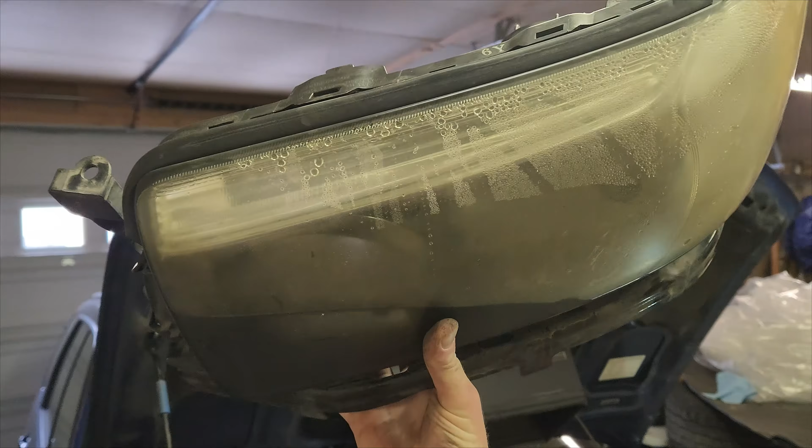I've got a fishbowl for a light. Look at that! What the heck? I've never seen that much. That's insane. How did these lights work at all? Don't overfill your blinker fluid.

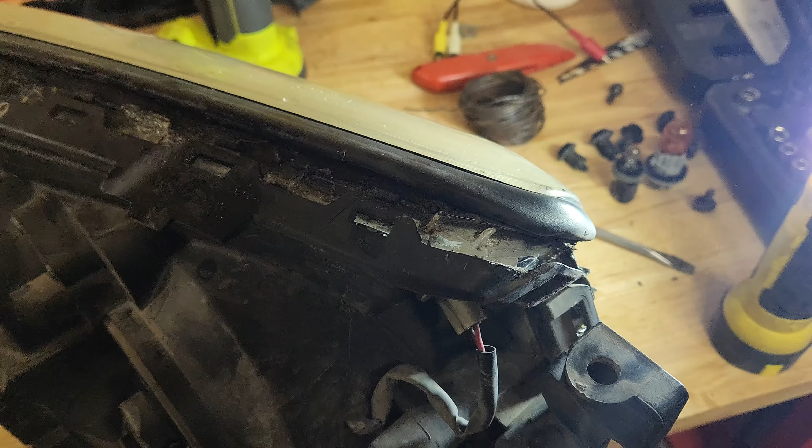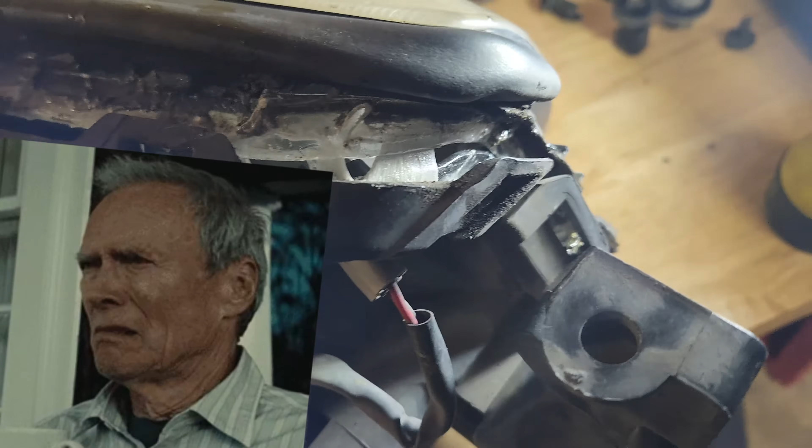As you can see, this headlight was well beyond the point of needing to be repaired. So after getting it out of the car, splitting it apart, that seal is gooey, it's disgusting, and it failed a long time ago. Right, so I got it apart.

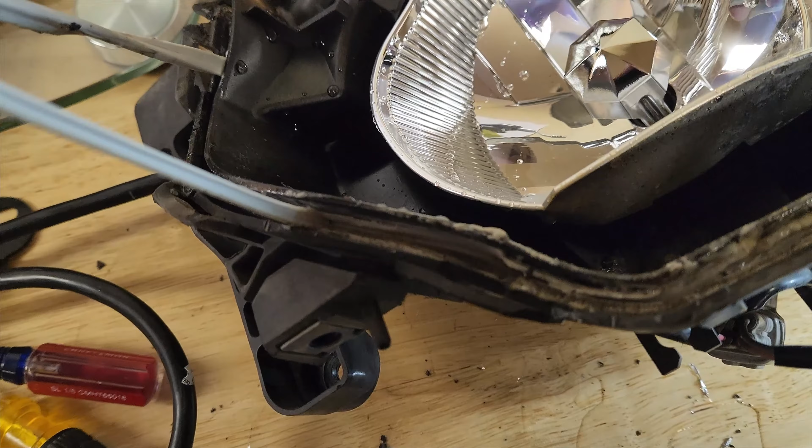Now I'm just going to work on getting this old seam filler pulled out because I've bought new ones. So we'll go nice and slow, hopefully it'll all come out nice. The best thing I found for cleaning this up after removing what I could was actually using gasoline and a rag. It took me about 45 minutes to clean everything out, but once I was done with that, I could finally move on to getting the new sealant.

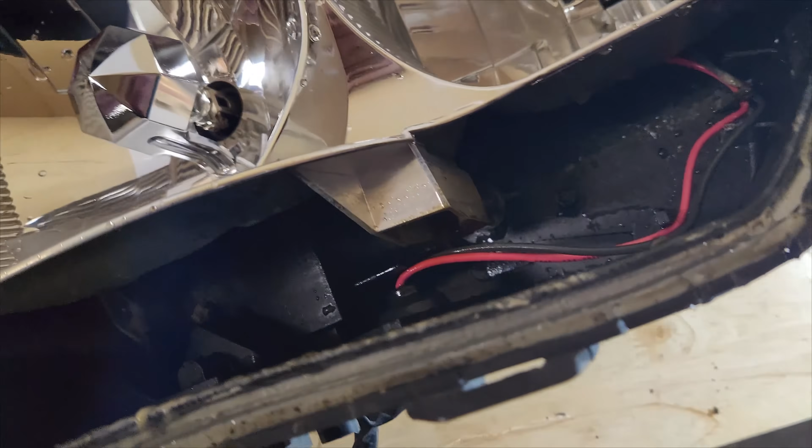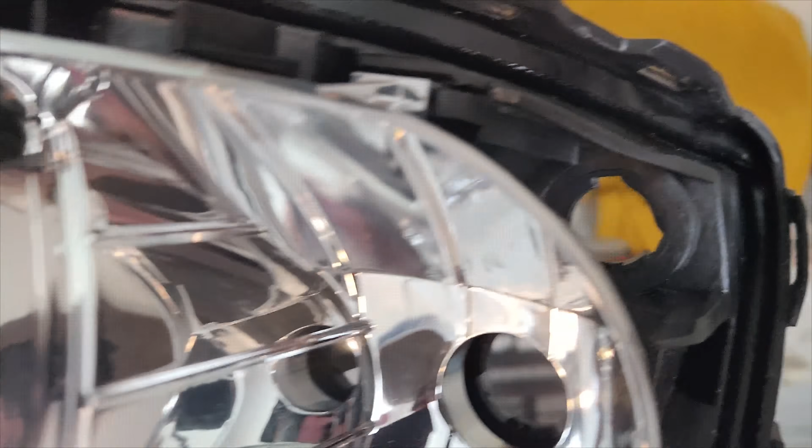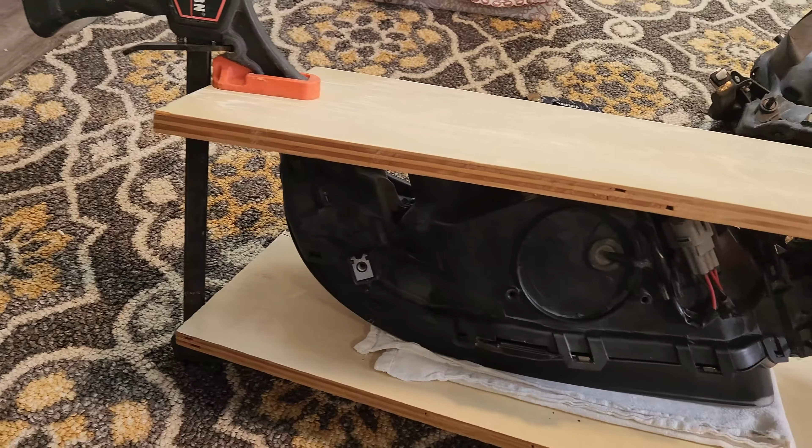You heat it up in the oven, and then you just insert it in. Alright, so I've got it running inside the channel here. Now it says to combine the two, so I'll just again dust everything off one more time. This is the last time these are going to be apart. Throw this guy on there. Alright, so now we've got this clamped down, and then just making sure each clip has been pushed down, and then we just let it dry.

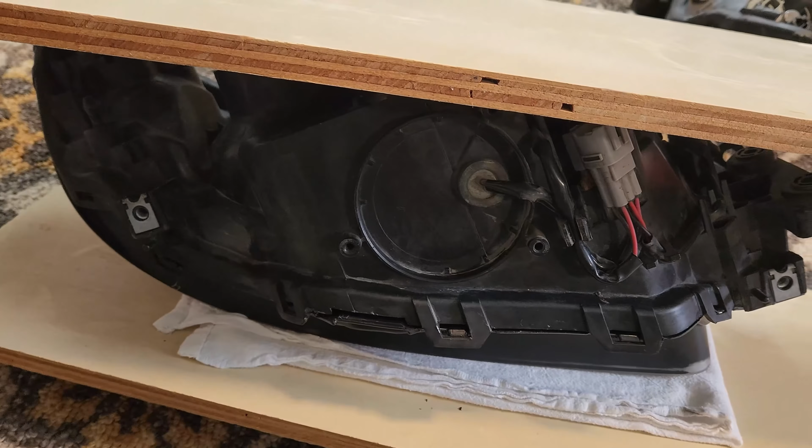So it takes 30 minutes for it to get back up to room temperature, and then we cross our fingers and hope it's sealed. And before we jump into putting clear coat on the headlights, I do have this STI hood scoop off the 2003 STI.

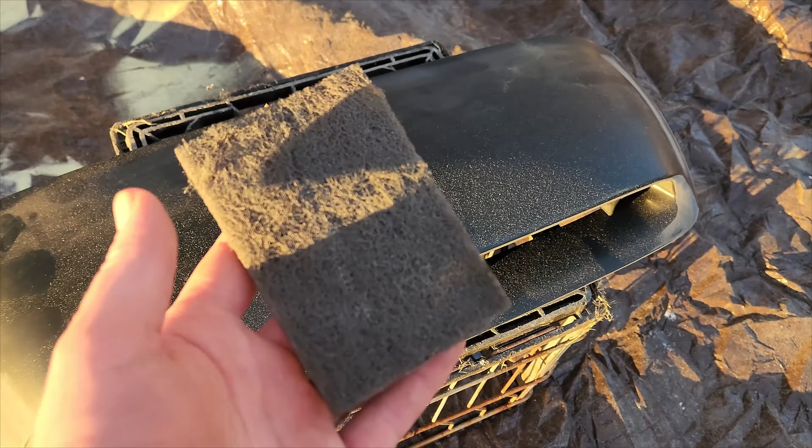I bought this brand new from Subaru, and really I just need to sand it, prime it, and then tape it and get it ready. And then that way, after I've got the base coat on, I can clear coat the headlights and the hood scoop at the same time. So we'll sand this down and then we'll get ready for paint.

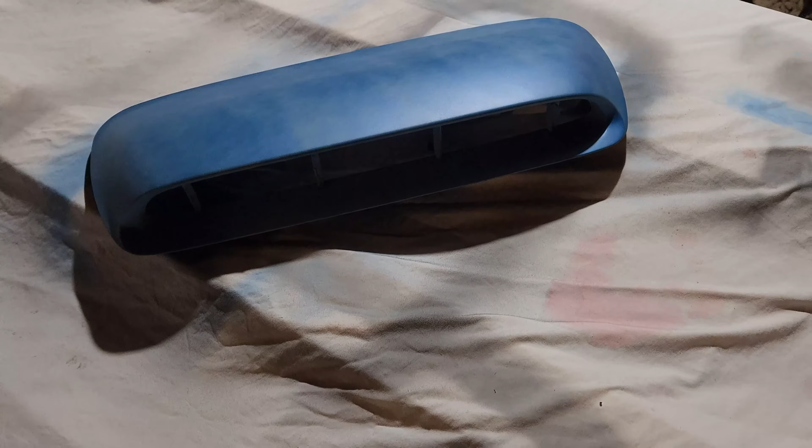Alright, so this is about 3 coats of primer and 1 coat of paint. And this is about 3 coats after that. So a total of 4 coats of base. Definitely looks a bit flat, like a base coat would.

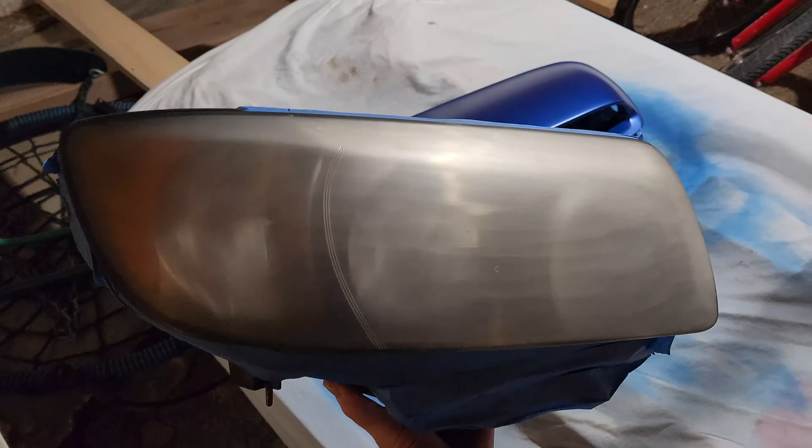So we're going to move on to remove this blue tape on the fins. We've also got the headlights here, this is up to 1500 grit, so we'll clear coat that guy as well. Alright, so after a couple layers of clear with the 2K, you're left with this final result.

Between that base coat and this, I'm really happy with how these turned out. Finally going to look good to have a painted hood scoop. Looking pretty darn good as well. I think those are about as close to a factory finish as you can get for headlights that have been sitting out in the sun for about 12 years. So very happy with these results. Let's get them back into the garage so we can finally get them installed.

Well, there you have it. That is a brand new scoop, looking minty fresh. And here you can kind of see, obviously it's not that dramatic of a difference, but I'm hoping that if I restore this paint, a little bit of paint correction, the differences won't be so significant. It'll be nice to have a bigger scoop, and then we'll just get the headlights in and we'll restore those, and we'll be all good to go.

One issue I did have with the headlights was that 2K clear. I don't know if it was too cold or what, but I have like these micro cracks. It's definitely in the 2K clear. I've never had that problem before, but we're just going to install them for now, and then we'll fix them later. We'll probably just sand them down and do another 2K. But for now, this is what I got.

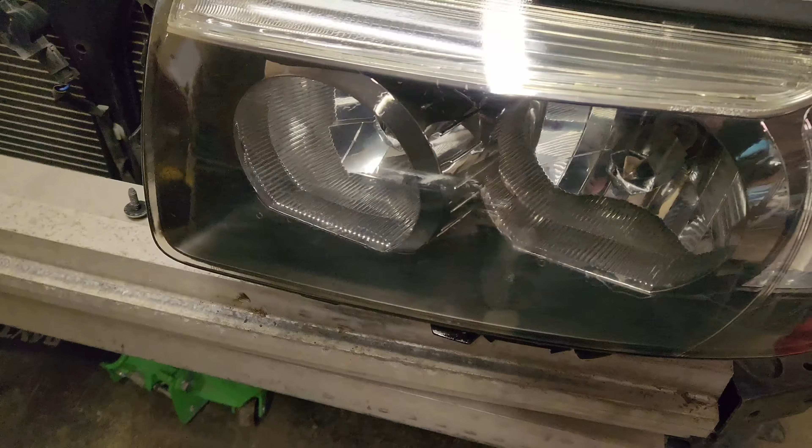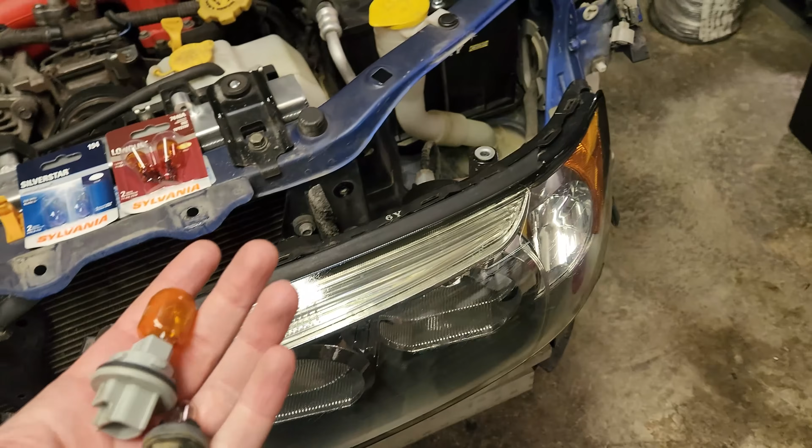New headlight has arrived, looking very good. So we'll start grabbing some bulbs, get these swapped over. Normally I wouldn't really bother switching out bulbs, but these are such a pain to get off, and I already have them off. Bulbs are cheap, so just order them now. Alright, we're just going to test these and make sure they work really quick. So far, so good.

And just a quick reminder how far we've come.

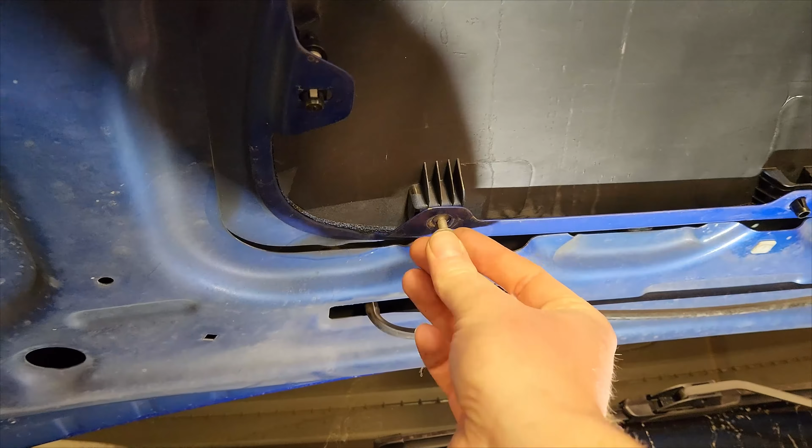Okay, step back a little bit. Oh my gosh, that looks huge to me. Oh, it looks good though. That I can work with. Sweet, I love it. Love it, love it, love it. I love it! Come on, let's go!

Alright, so we're making progress. Fender liner is off, I'll probably tidy it up a little bit since I got everything off. And then once that's all cleaned up, I've got an aftermarket liner, whatever that is, TRQ. And we're gonna see how well this bad boy lines up.

Really, all my old one was missing was this chunk right here. And what I found was easiest is there's that bolt up by the strut. Start with that so it holds up the whole thing.

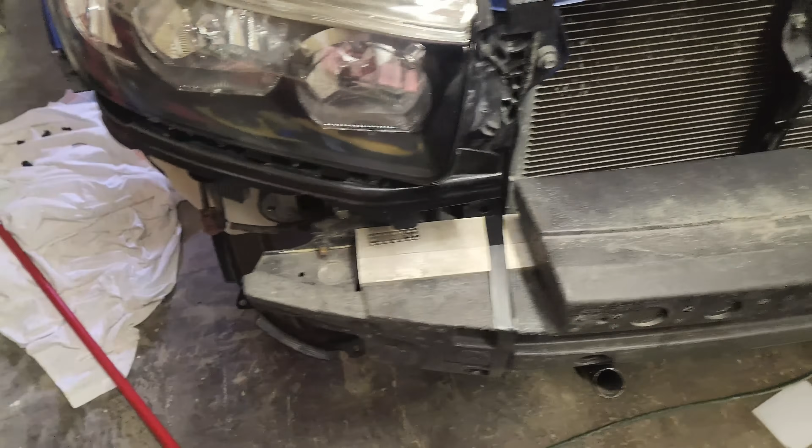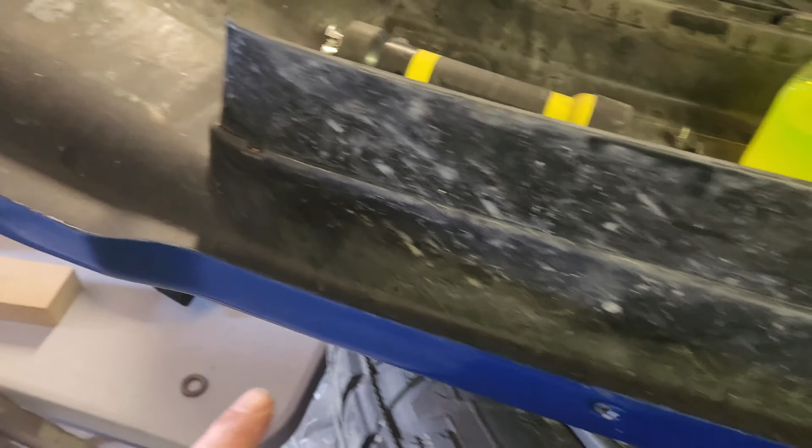Alright, with the fender liner on, the next step is getting ready for the sport lip. So you can see there was double-sided tape here. The factory one got ripped off. I guess the previous owner was getting towed out, and unfortunately the front lip didn't make it. So I'm going to be replacing it today.

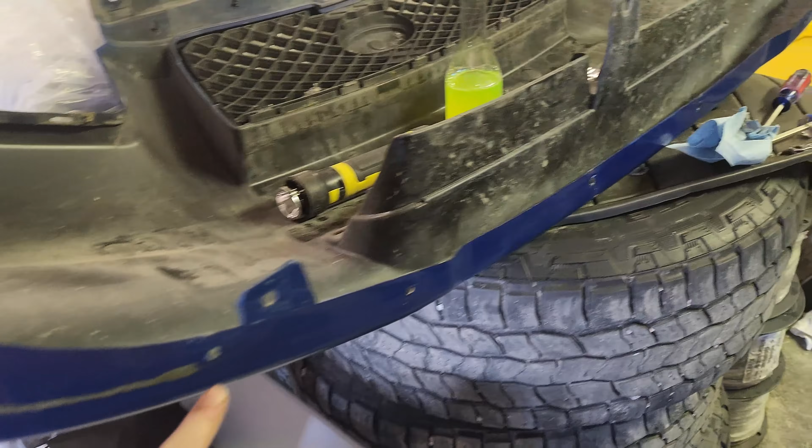Next step, we're just going to get the old 3M tape off. We'll kind of replace it in the same spot, and then I had to undo a bunch of bolts. So just a couple of these guys here, and we'll get the new one fastened on, and then we'll install the front bumper.

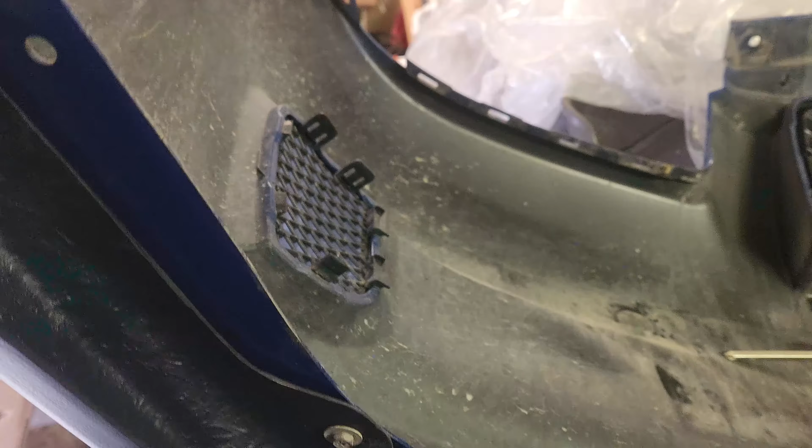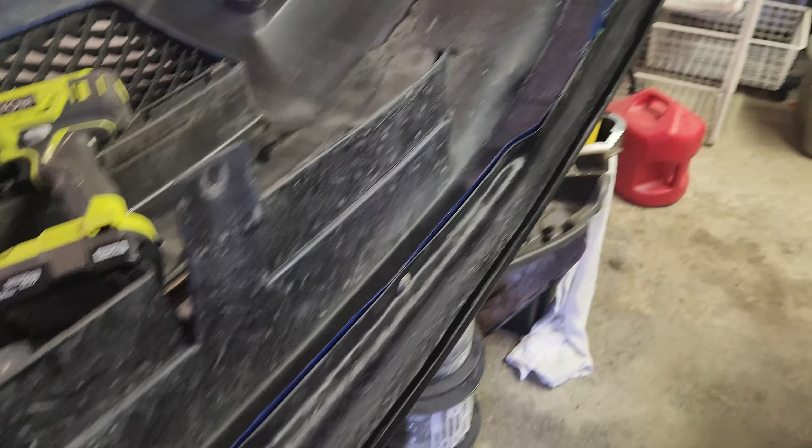So bumper or spoiler, lip, whatever you want to call it, the lip is getting installed. I had enough original hardware where I used it, and then a couple spots I'm just zip tying. Front lip fits pretty good for a third party manufactured piece, I think made in Russia or something like that.

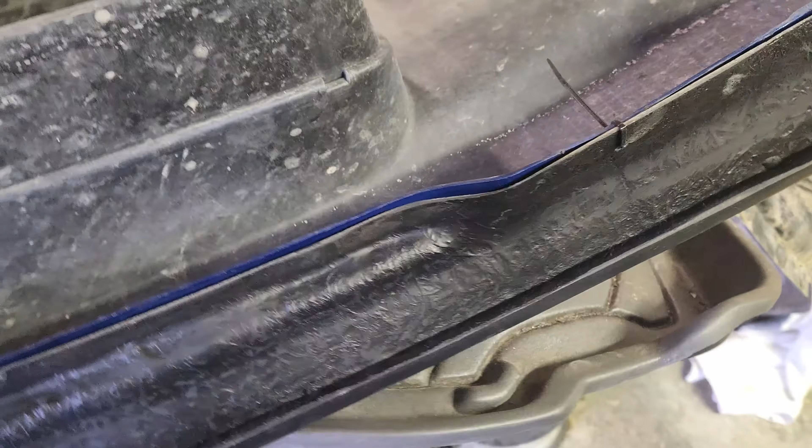So we'll finish getting this installed and go from there. 20 minutes later, the front end is really coming together. That front lip makes a world of difference. I love it. Big old hood scoop.

That surprisingly went on pretty easy, so I'm very happy with that. The FXT in World Rally Blue is coming together.

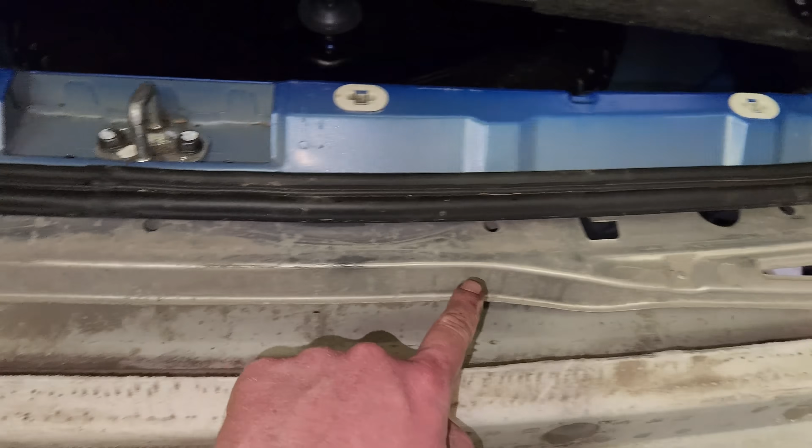And now for something completely different. All right, rear bumper is off. There's clips right through here, just a pain in the butt to get to. I had to release them from underneath.

But anyways, the goal is we're gonna see how well I can mend this back together. Not expecting perfection, just need it tied up a little bit stronger, and then we'll get that back on. The fuel pump's the last thing, and then we can tune.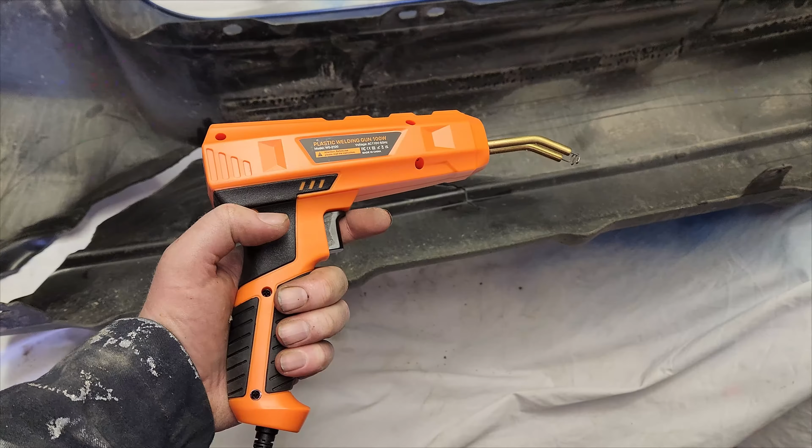All right, so we're gonna test this guy out. It gets red hot, I push it in, and then I let go. It'll cool, and then when it's cold, pull it off and you have a stitch. So we're gonna see if we can stitch this back together.

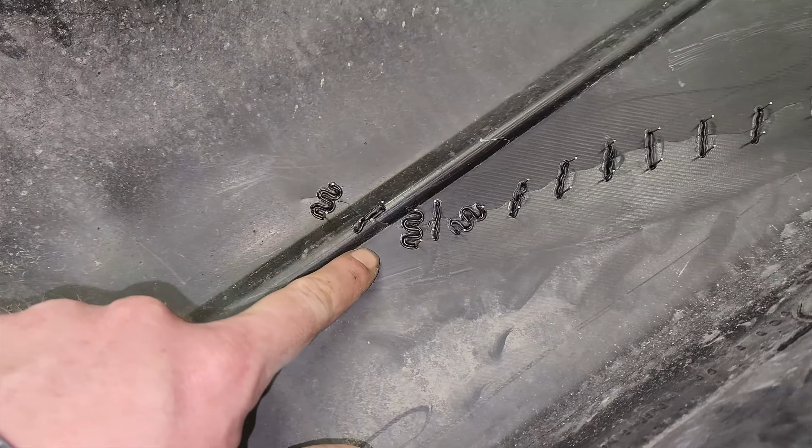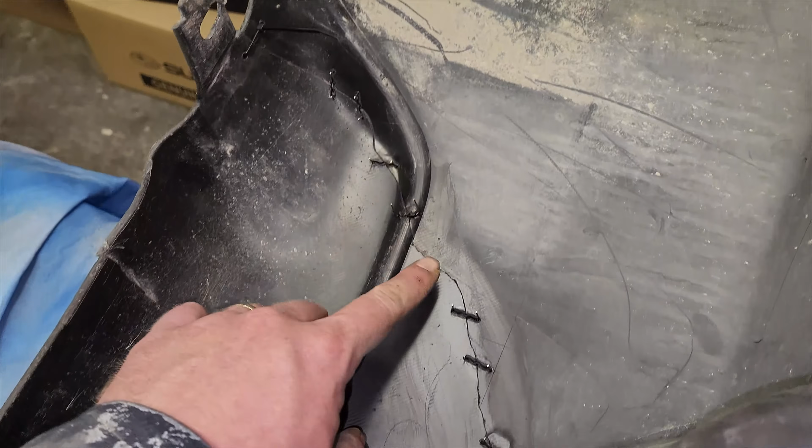We were able to, I started with these really bendy ones. I found that the straight ones were a lot easier. But ultimately what helped the most was starting the whole thing with a zip tie, two holes in the zip, and that really held everything in its shape. So when you flip it over, it actually looks pretty good.

I mean, it's about what I would expect. If I rotate the bumper, it's alright, like... Here in the middle of the bumper, you can definitely see the crack more. This is where it really fit together quite well. So overall, I'm really happy with that.

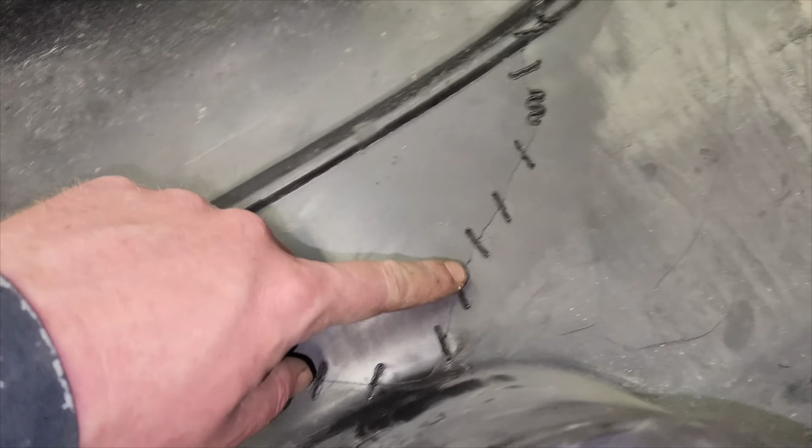Final step, so now I've snipped off all the tall ends on that. And then I went through with a wire brush and just kind of scuffed it up a bit, so that epoxy has a little bit more to grab onto. Again, this should just help. I'm hoping it's overkill for fixing this rear bumper.

So I'm gonna apply this and I'll be right back. All right, last step is to get this off. We're just gonna take the X-Acto knife and very slowly peel it off.

Day 2, and this epoxy is hard as a rock. All right, so bumper flipped around here, we got that sticker off. We can see a little bit of fade here, and then here's the cracked bumper.

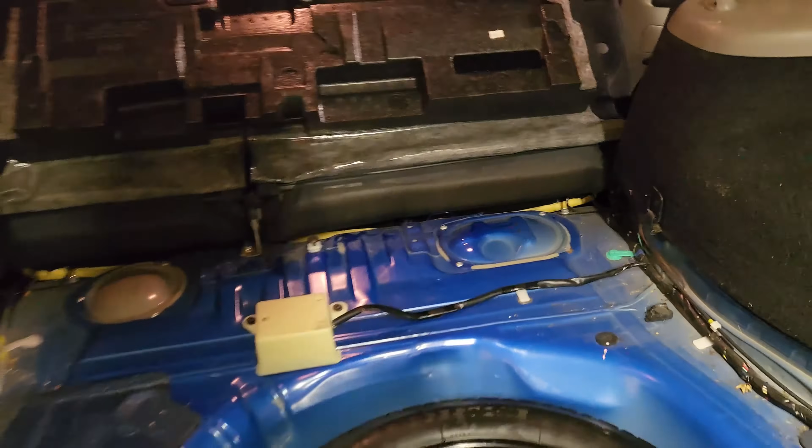All right, rear bumper is on, and you can see the crack. But overall, I would say that looks a heck of a lot better. Now we can focus on getting this guy out, replace the fuel pump, and then we're ready to go.

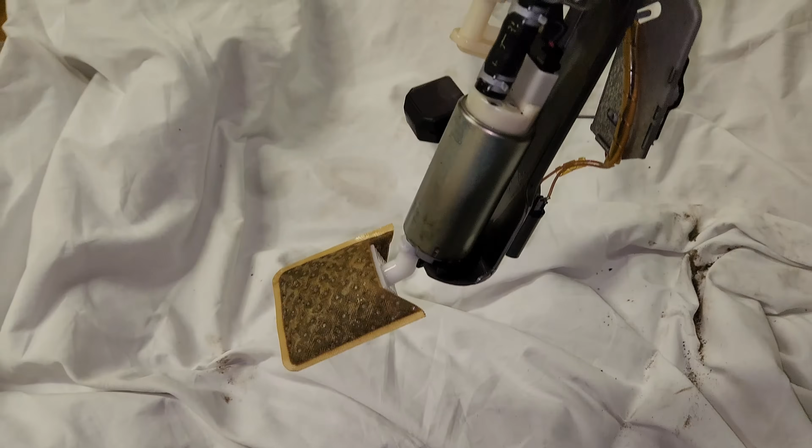I thought they smelled bad on the outside. That was miserable to get out. Once it's out, it makes more sense. I didn't realize that it was a 45-degree angle. I thought it was, you know, flat like that. So...

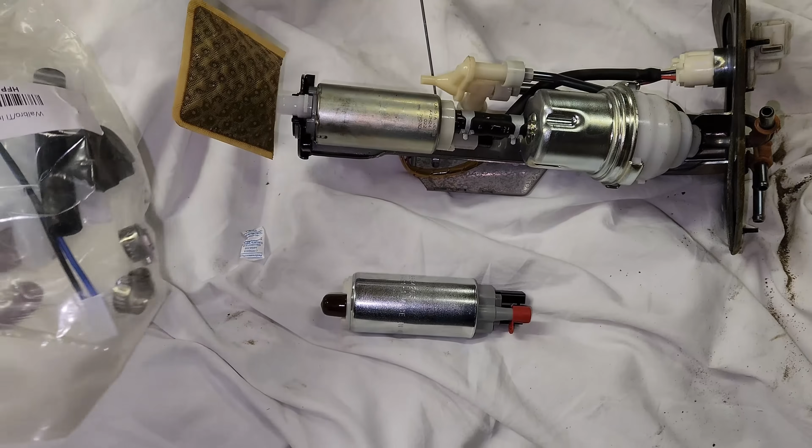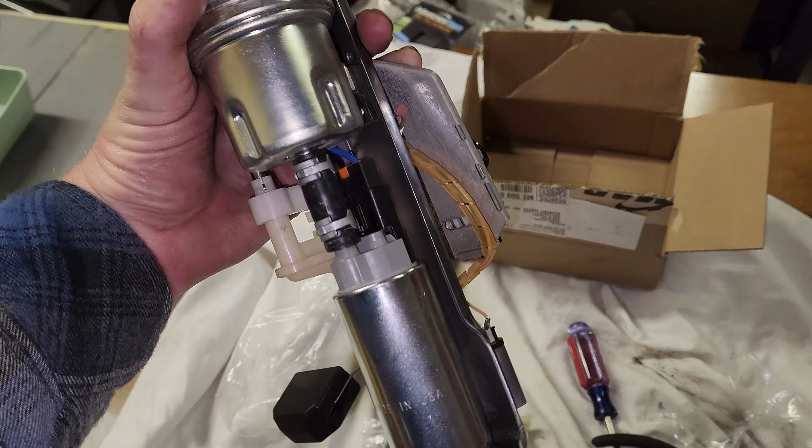A couple new parts as well, so we'll do our best to just get everything set up correctly and go from there. All right, made in the USA. So now we just got to get this back in, plug it in, and cross our fingers that it works.

All right, pump went in insanely easily, so that was nice. Moment of truth, it's all plugged in. Great success. So, fixed the fuel leak.

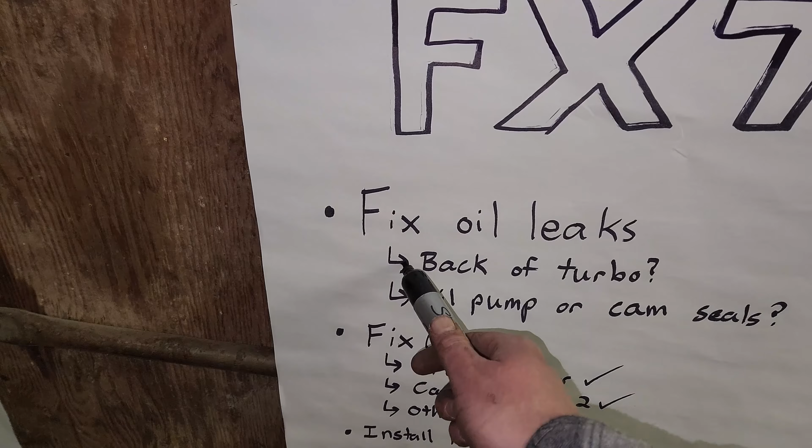So I had it taken into Subaru and he did a dye test. It ends up it was just oil from the top of the engine that was kind of working its way down, from when my oil pump sensor had broken. So that's done.

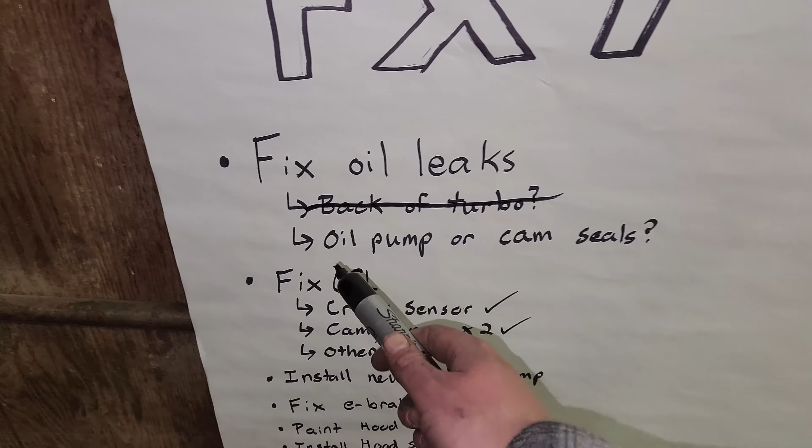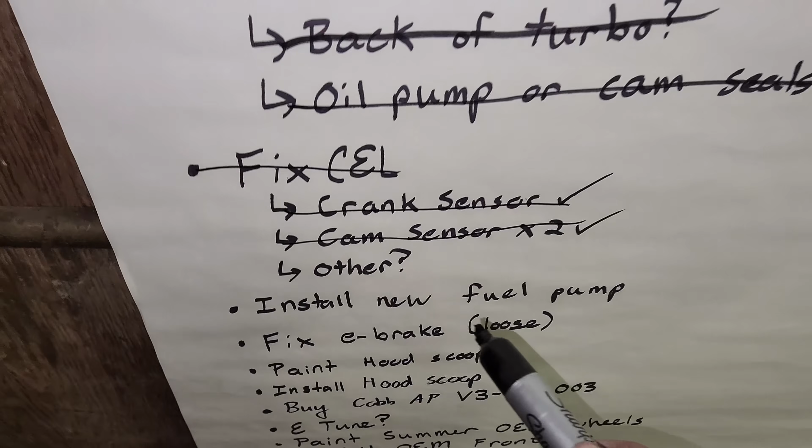And then when he cleaned the engine bay, I had a connector that got water in it, and that was telling me to replace all those sensors. We just did the fuel pump right now, so fuel pump installed, ready to go.

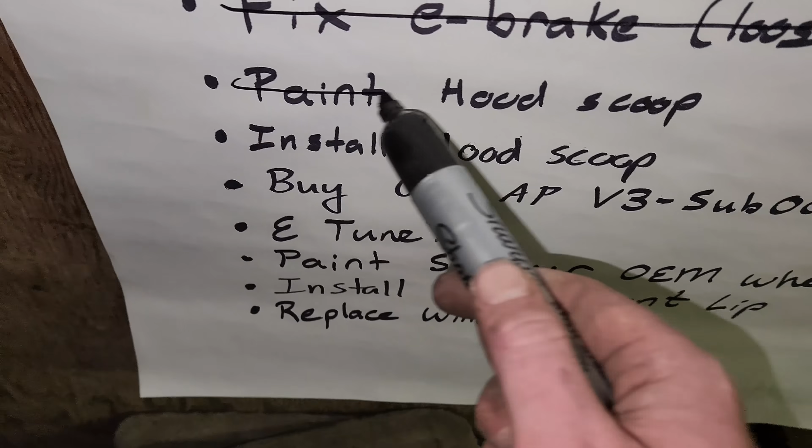Fixed the e-brake, they also did that at the shop. We have painted the hood scoop, we have installed the hood scoop. I've got a COBB access port, and I have ordered my e-tune.

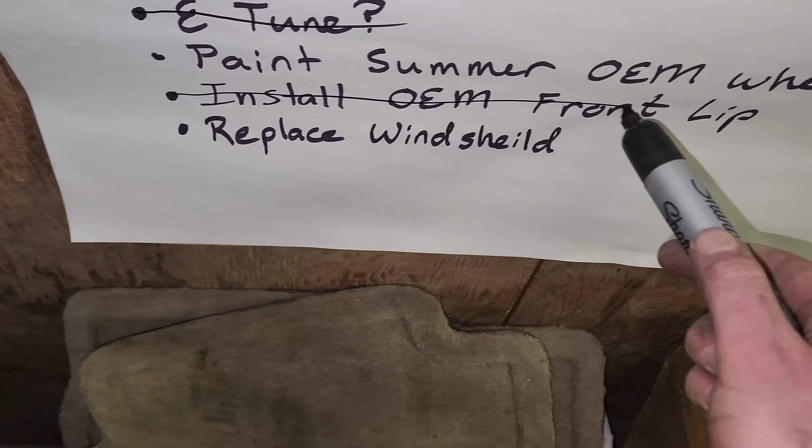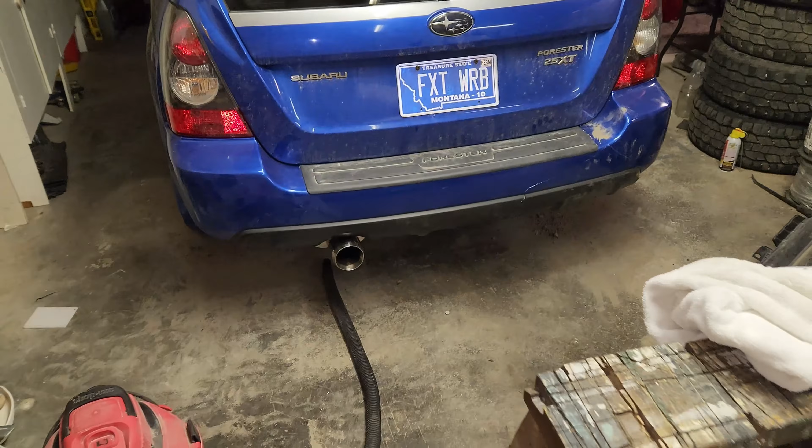Paint the OEM wheels, I have installed the front lip, and I did have the windshield replaced. Really, guys, all I've got left to do is paint those wheels, get them installed, and we're done. So we're gonna start tuning this thing, the whole e-tune. I might just make a video specifically on that.